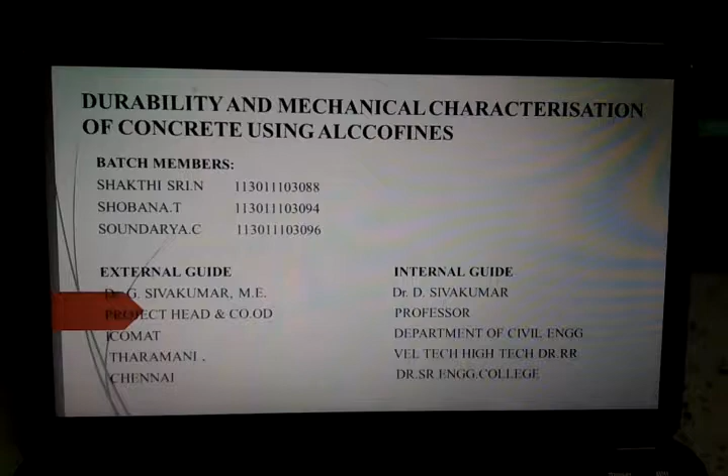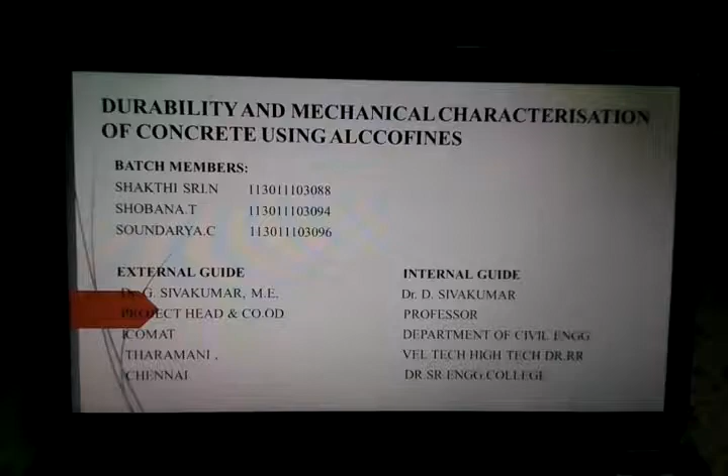Our project is Durability and Mechanical Characterization of Concrete using alccofines. Aim of our project is to evaluate the performance of concrete containing a supplementary cementitious material called alccofines, which is nothing but ultrafine GGBS.

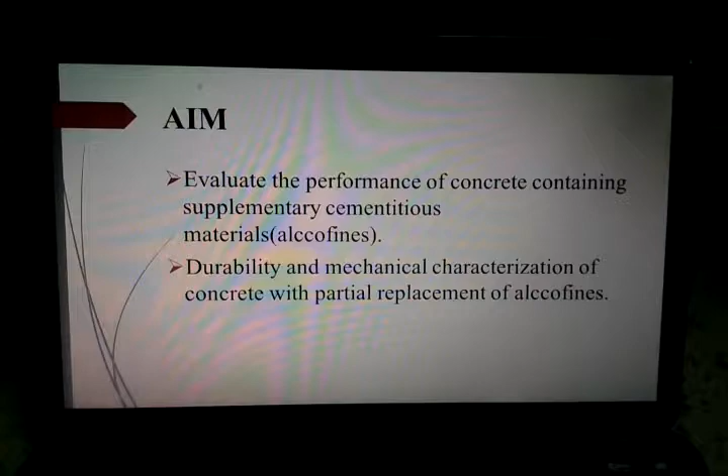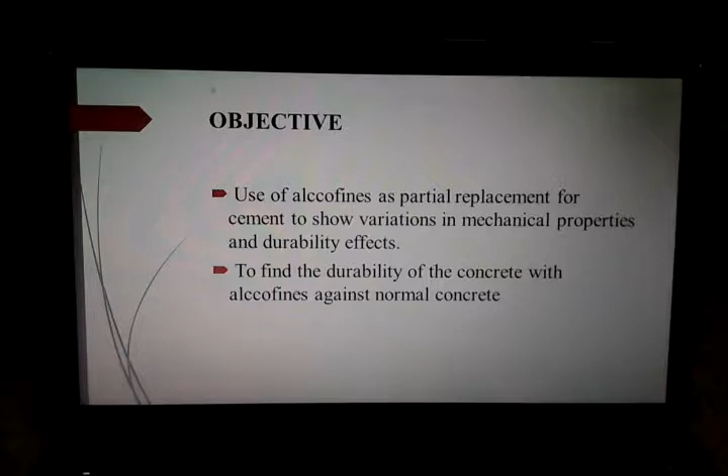The durability and mechanical characterization of concrete with partial replacement of alccofines is done. Objective: use of alccofines as a partial replacement for cement to show the variations in mechanical properties and durability effects is the main objective, and also to find the durability of concrete with alccofines against the normal concrete.

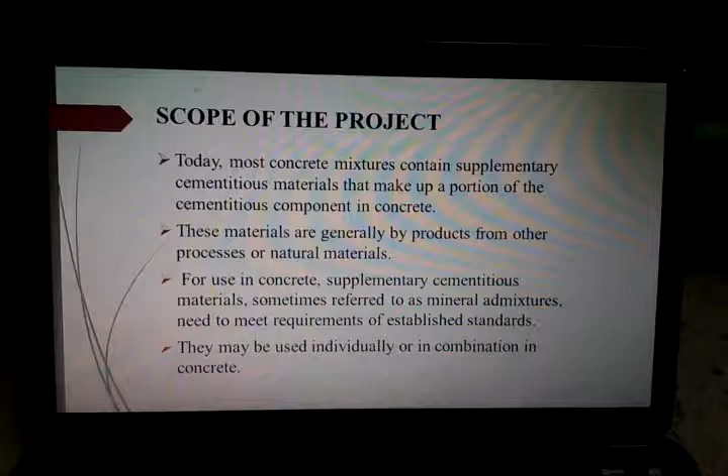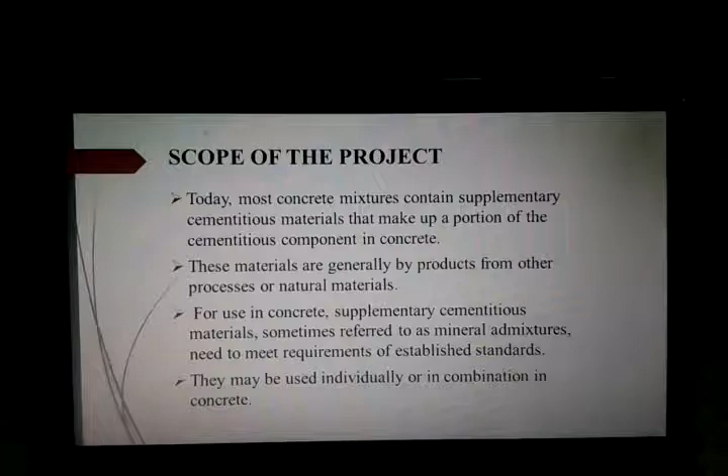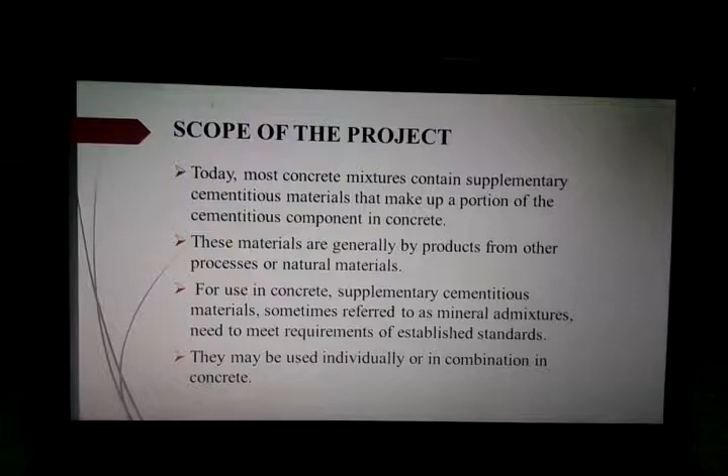The scope of the project is that today most concretes contain a supplementary cementitious material that makes up a portion of the cementitious component in the concrete. These materials are generally byproducts from other processes or natural materials. For use in concrete, supplementary cementitious materials, sometimes referred to as mineral admixtures, are added to meet the requirements of established standards. These may be used individually or in combination with other materials.

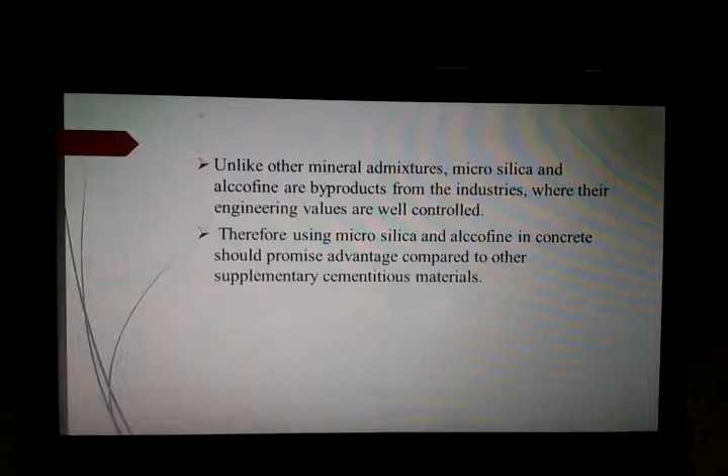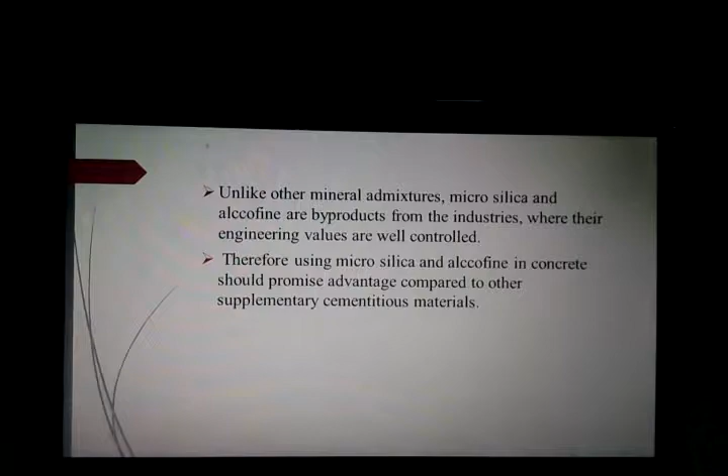Unlike other mineral admixtures, microsilica and alccofine are byproducts from industries where the engineering values are well controlled, and as they are byproducts, they are more useful than slag. Therefore, using microsilica and alccofine in concrete should promise advantages compared to other supplementary cementitious materials.

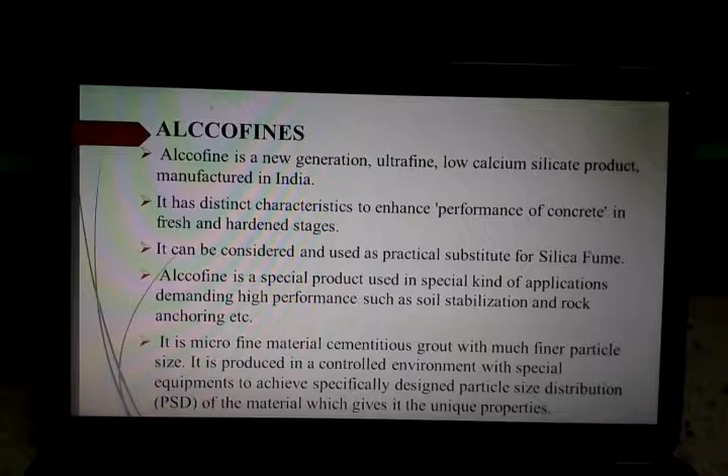Alccofine is a new generation ultra-fine low calcium silicate product manufactured especially in India. It has distinct characteristics to enhance performance of concrete in fresh as well as hardened stages. It can be considered and used as a practical substitute for silica fume.

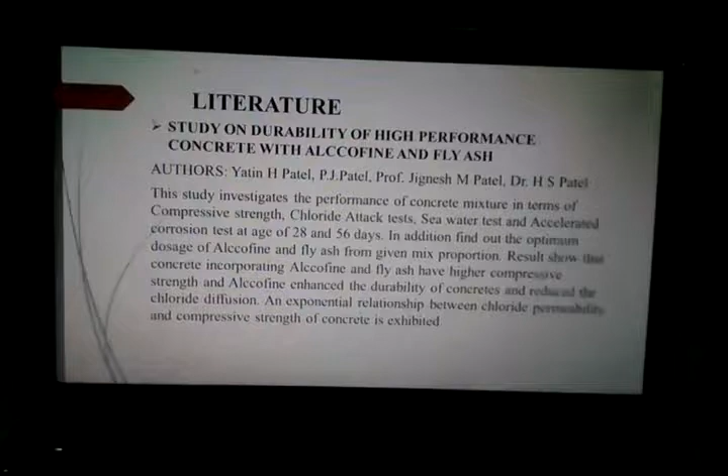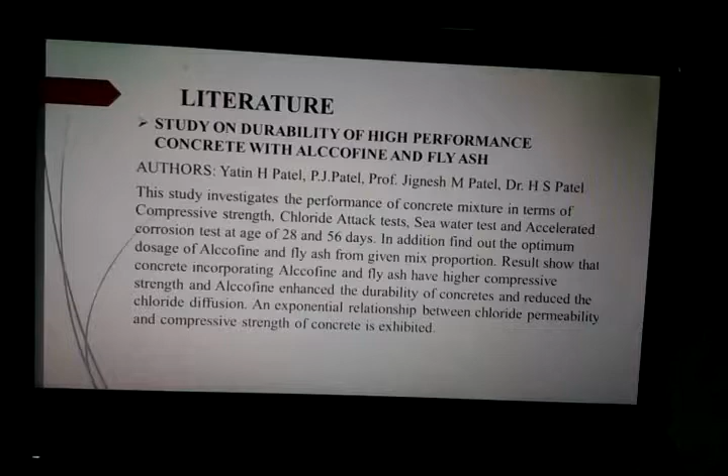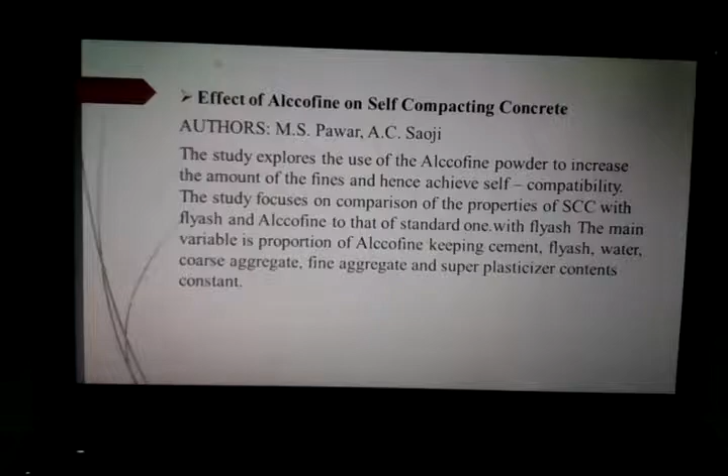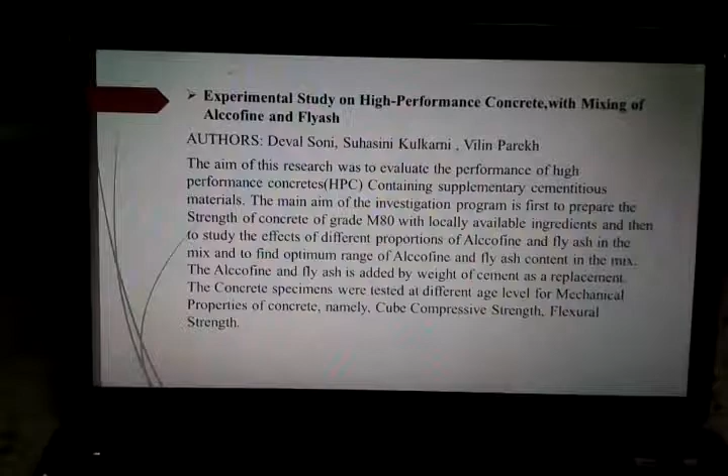Literature reviews: Following the literature we have collected, the first is a study on durability of high performance concrete with alccofine and fly ash, authored by Yatin H. Patel, P.J. Patel, Professor Jignesh M. Patel, Dr. H.S. Patel. The next paper is the effect of alccofine on self-compacting concrete, authored by M.S. Pawar and A.C. Saoji. The third paper is an experimental study on high performance concrete with mixing of alccofine and fly ash, authored by Deval Soni, Suhasini Kulkarni and Vilin Parekh.

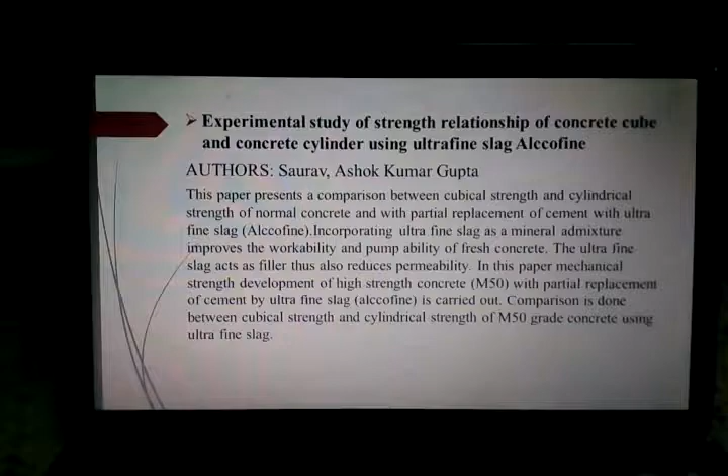The next paper is an experimental study of strength relationship of concrete cube and concrete cylinder using ultrafine slag of Alccofine, authored by Saurav Ashok Kumar Gupta.

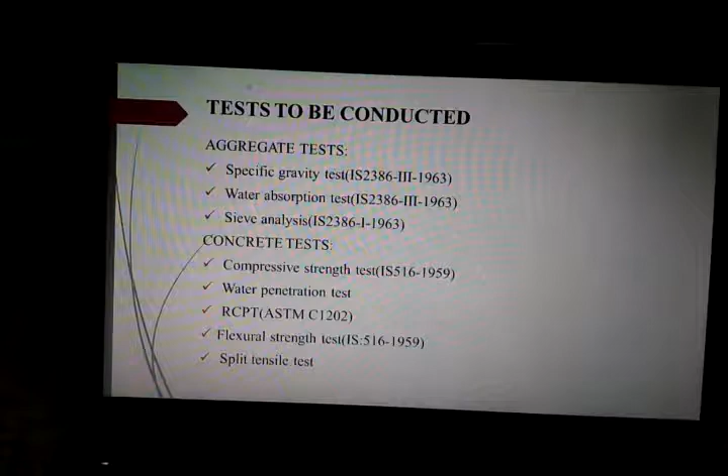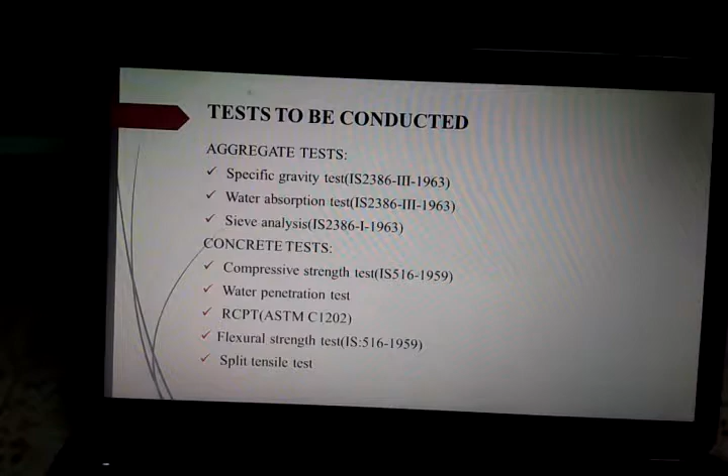The tests to be conducted are as shown here: aggregate test, specific gravity test according to IS 2386 Part 3 1963, water absorption test and sieve analysis of the same, concrete test, compressive strength test, water penetration test, RCPT - rapid chloride penetration test conforming to ASTM C1202, and flexure strength test.

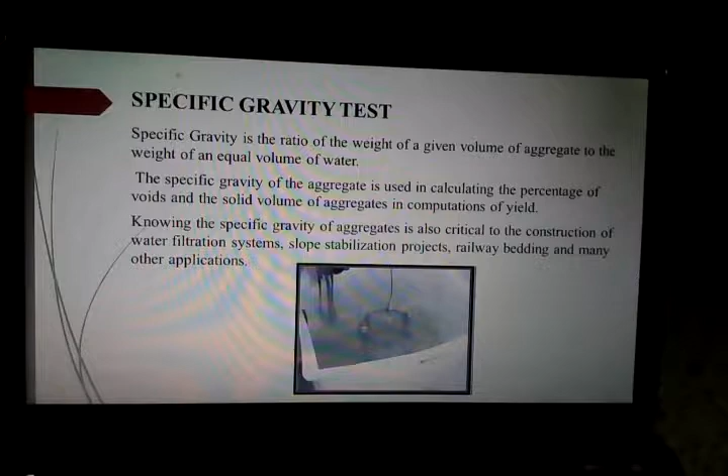Specific gravity test: specific gravity is the ratio of weight of a given volume of concrete or aggregate to the weight of equal volume of water. The specific gravity of aggregate is used in calculating the percentage of voids and the solid volume of aggregates in computation.

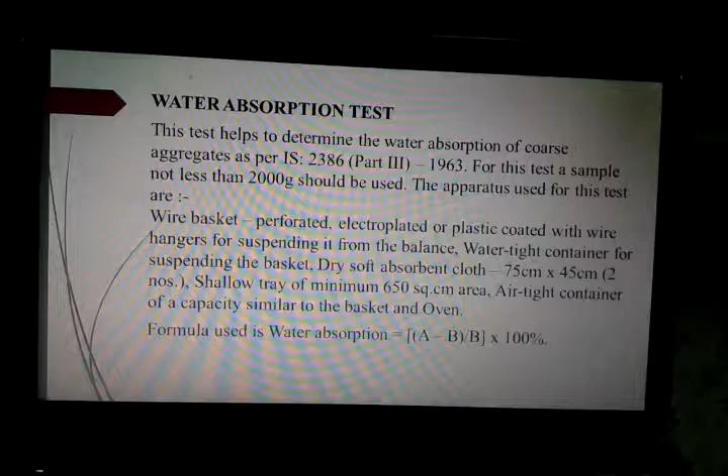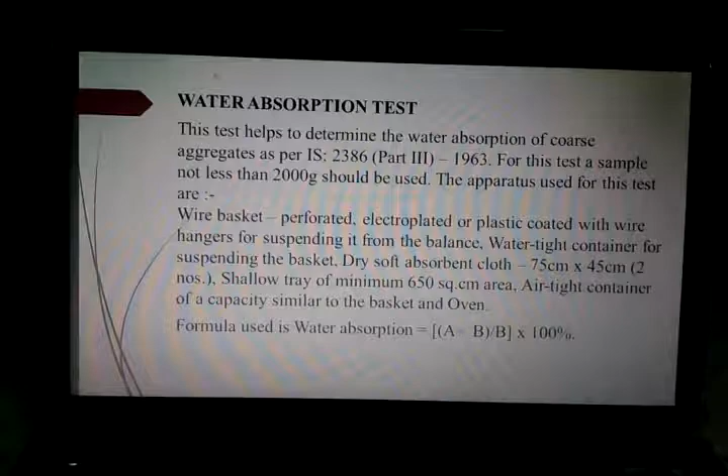Water absorption test: this test helps to determine the water absorption of coarse aggregates as per code IS 2386 Part 3 1963. The formula used is water absorption equals A minus B divided by B into 100%.

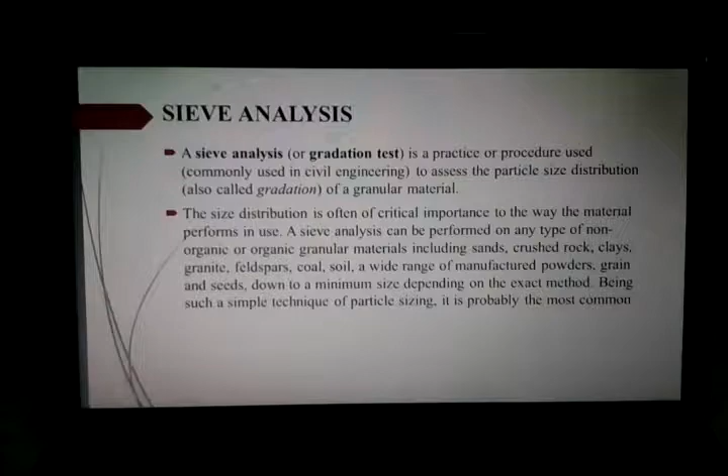Sieve analysis is nothing but the gradation test. It is a practice or procedure used commonly in civil engineering to assess the particle size distribution of granular material for both fine and coarse aggregate.

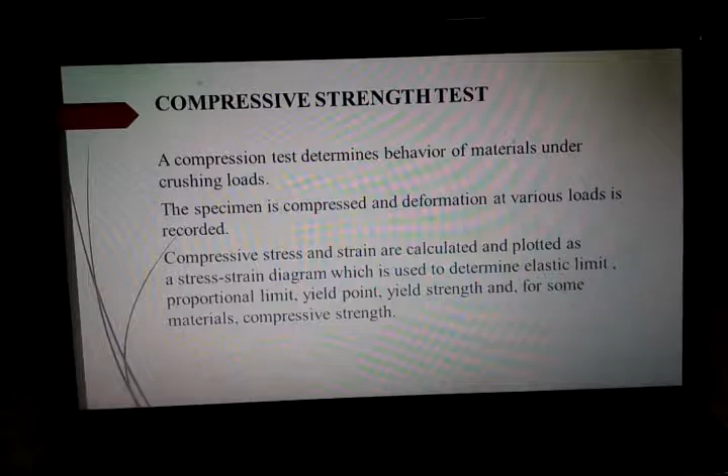Compressive strength test: a compression test determines the behavior of materials under crushing loads. The specimen is compressed and deformation at various loads is recorded. Usually a cube of size 150 by 150 is used.

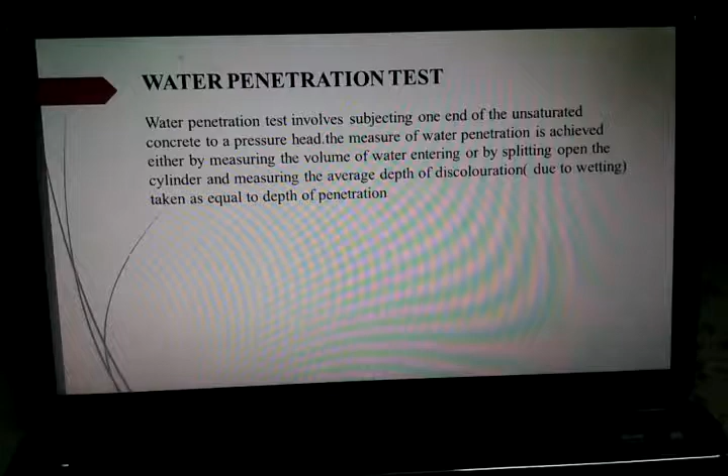Water penetration test involves subjecting one end of the unsaturated concrete to a pressure head. The measuring of the water penetration is achieved either by measuring the volume of water entering, or by split opening the cylinder and measuring the average depth of discoloration due to wetting, taken as equal to the depth of penetration.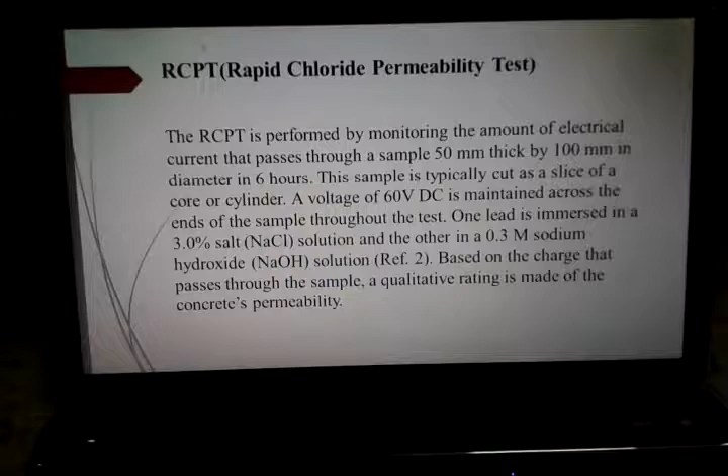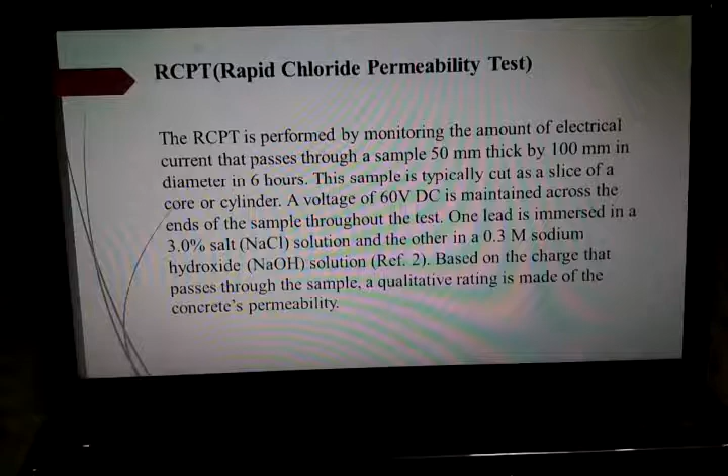The sample is typically cut as a slice of core or a cylinder. The voltage of 60 volt DC is maintained across the ends of the sample throughout the test. One lead is immersed in a salt, 3% NaCl solution, and the other in 0.3 molarity of sodium hydroxide, NaOH, solution.

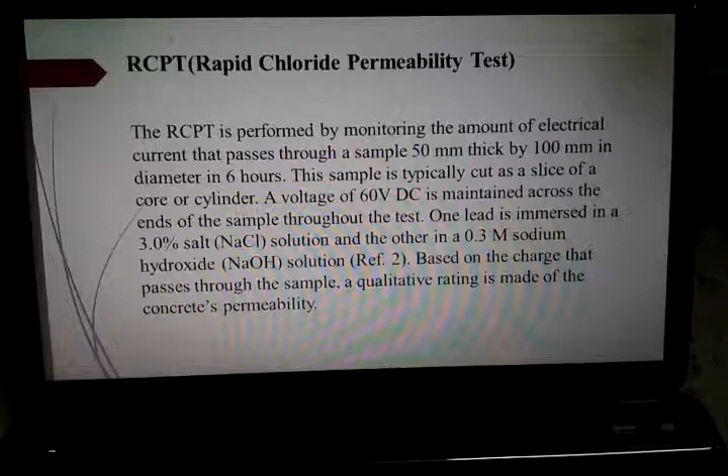Based on the charge that is passed through the sample, a qualitative rating is made on the concrete's permeability.

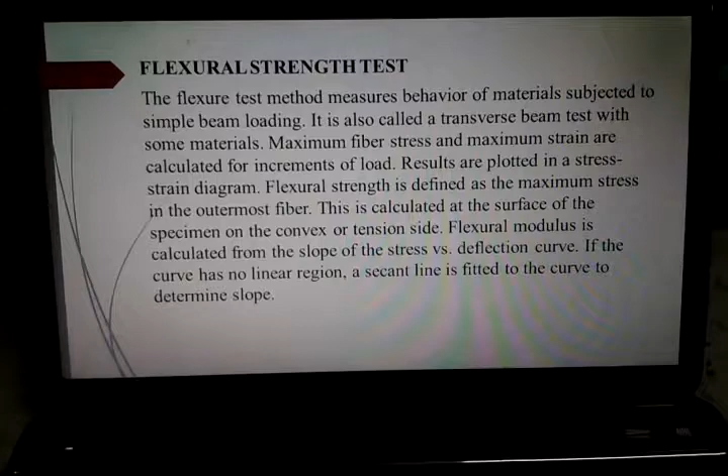Flexural strength test. The flexural test method measures the behavior of material subjected to a simple beam loading. It is usually taken as 2-point loading, also called a transverse beam test. With some materials, the maximum fiber stress and maximum strain are calculated for increments of load, and results are plotted in a stress-strain diagram.

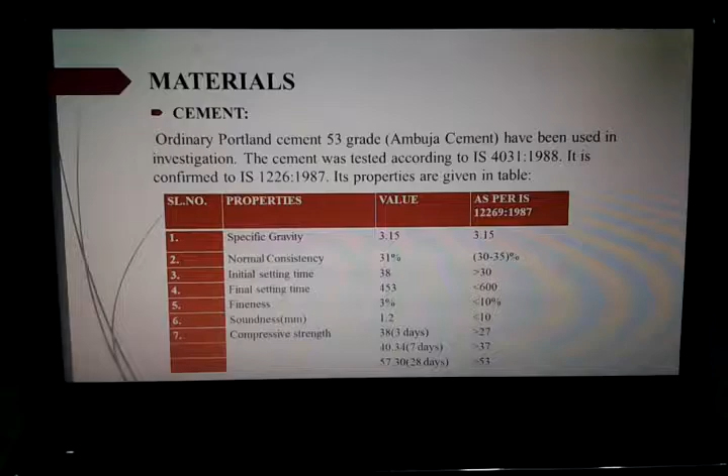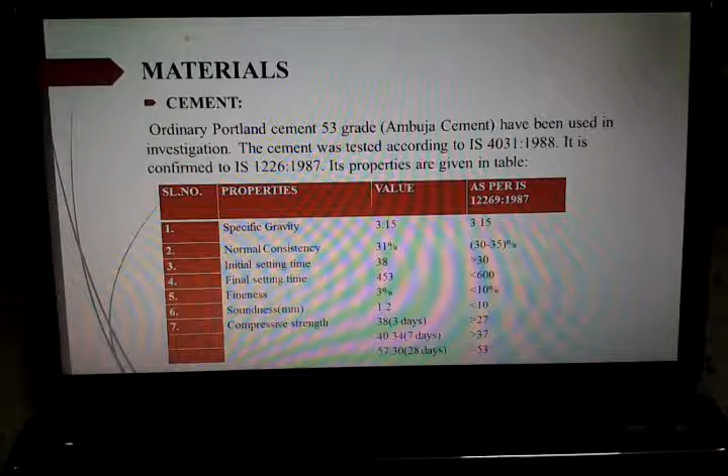Materials: cement. Ordinary Portland cement of grade 53 is used. The cement was tested according to IS 4031 1988, and it conforms to IS 1226 1987. Its properties are as tabulated.

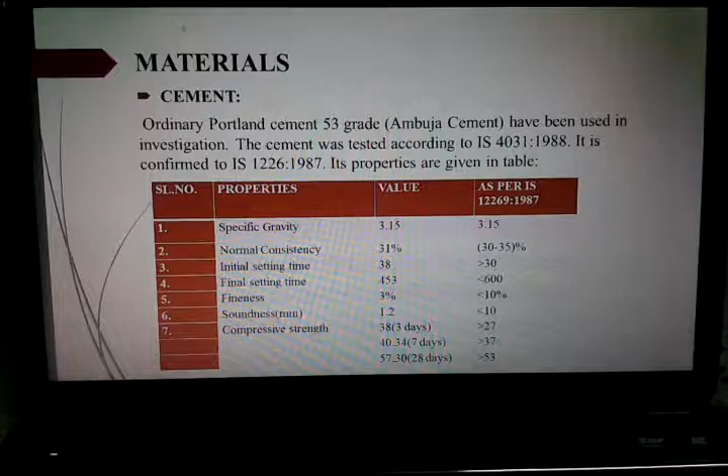Specific gravity is 3.15. Normal consistency is 31%. Initial setting time is found to be 38 minutes. Final setting time is 453 minutes. Fineness is 3%. Soundness is 1.2.

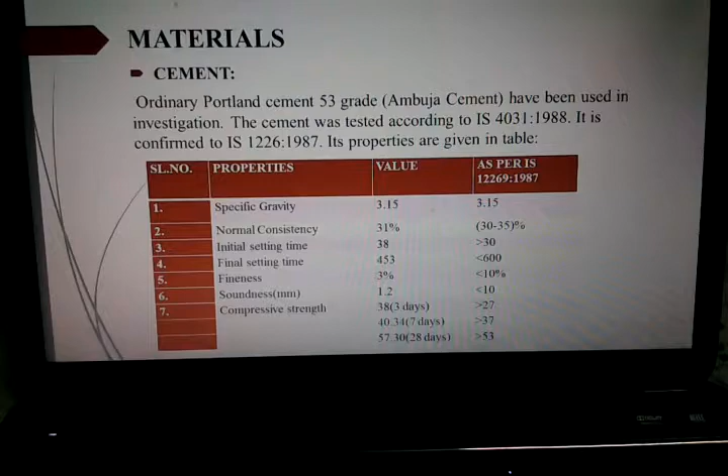The values are found to be as per IS 12269 1987. Fine aggregate and coarse aggregate: the properties of fine aggregate and coarse aggregate are summarized.

Coarse aggregate of 20 mm grade and 12.5 mm grade are used. Specific gravity of the same is tabulated. The fine aggregate is generally manufactured sand, but we've also taken the specific gravity and total absorption of river sand.

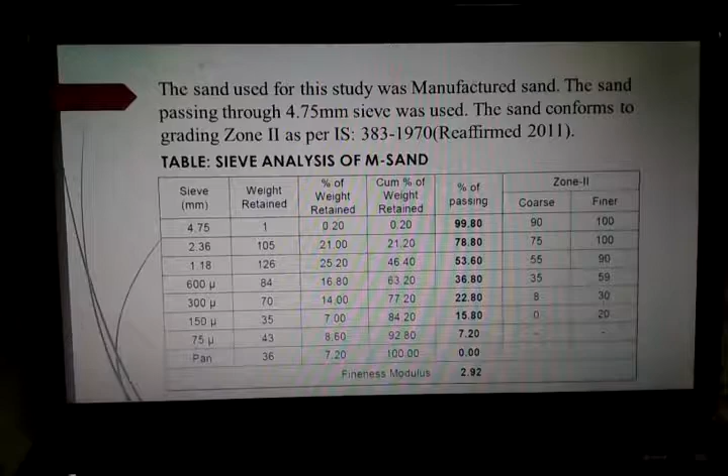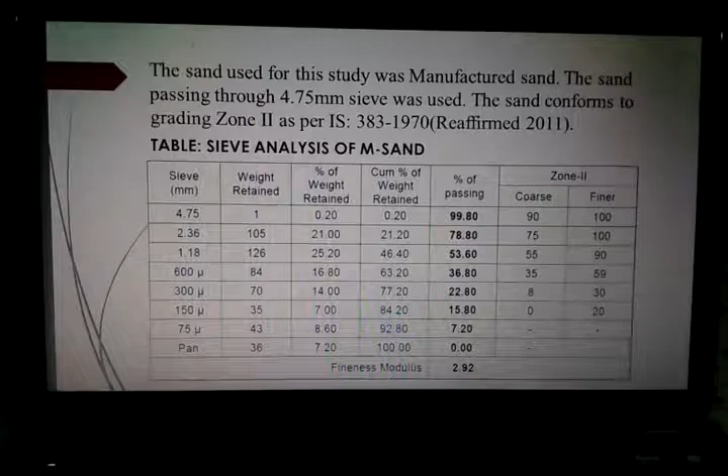The sand used for this study is manufactured sand, passed through a 4.75 mm sieve. It conforms to grading zone 2 as per IS 383/1970, reaffirmed in 2011. The sieve analysis of the M sand is as given, and the fineness modulus of the same is 2.92.

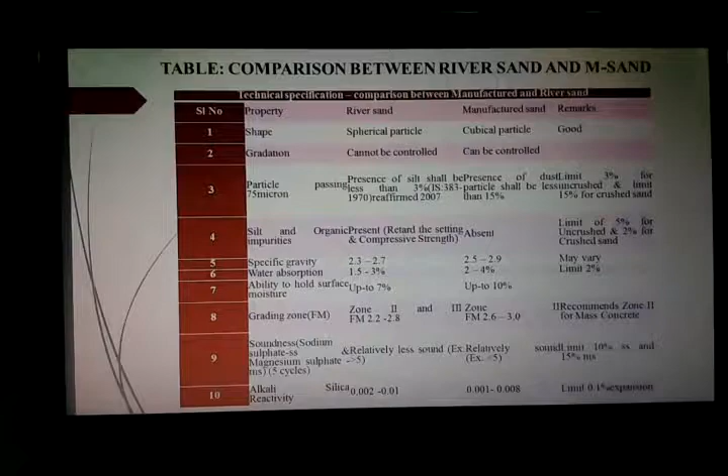A comparison between river sand and M sand is given. We have used M sand over river sand due to certain characteristics, and also because river sand availability is very minimal in the southern region of Tamil Nadu.

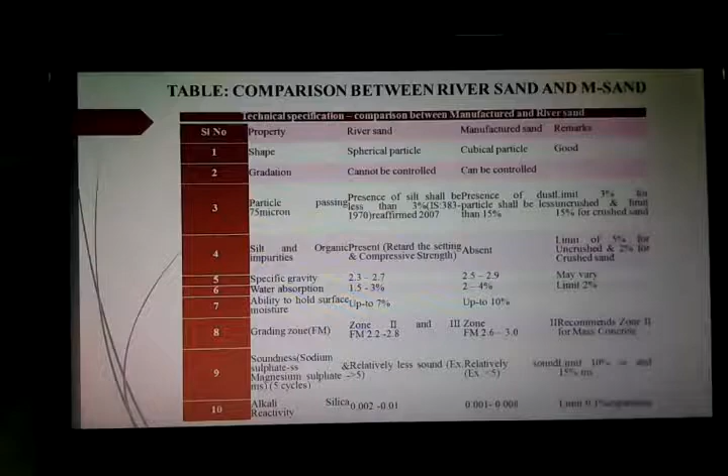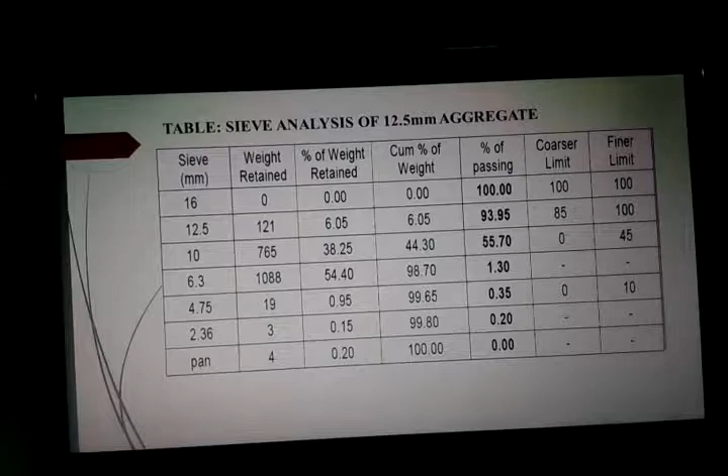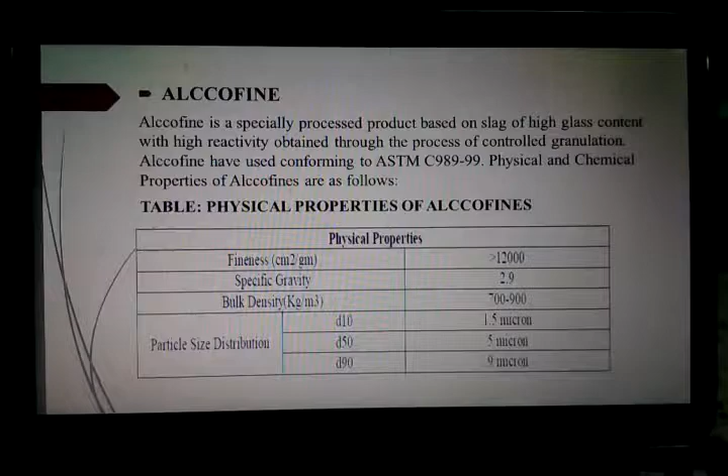Alccofine. Alccofine is a specially processed product based on slag of high glass content with high reactivity, obtained through the process of controlled granulation. The Alccofine used conform to ASTM C989-99.

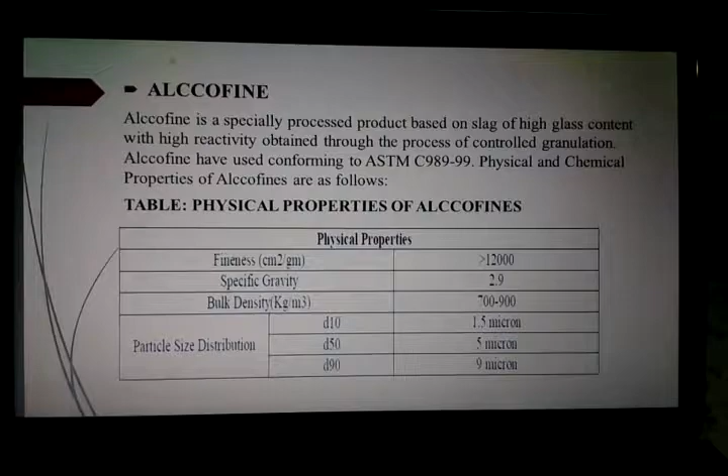Physical and chemical properties of Alccofines are shown. Fineness, specific gravity and bulk density are given here. Fineness is greater than 12,000 cm square per gram. Specific gravity is 2.9. Bulk density is 700 to 900 kg per meter cube.

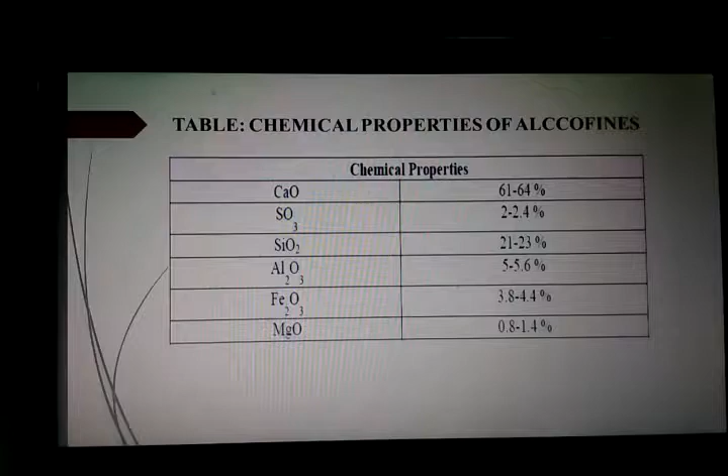Table: chemical properties of Alccofines. This is the chemical composition of the Alccofines: CaO, SO3, SiO2, Al2O3, Fe2O3 and MgO are as given.

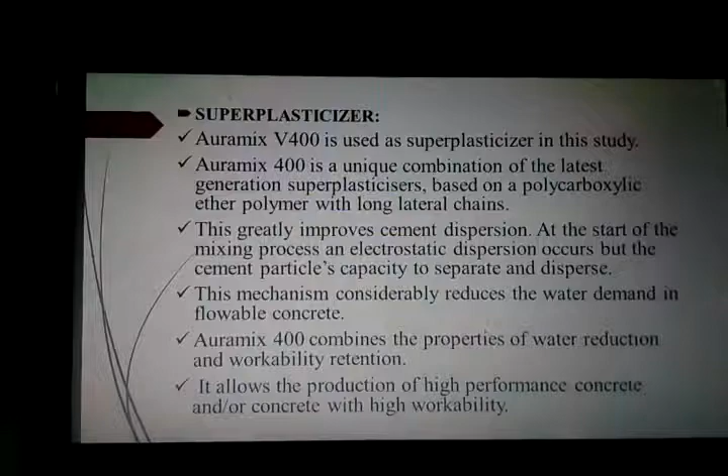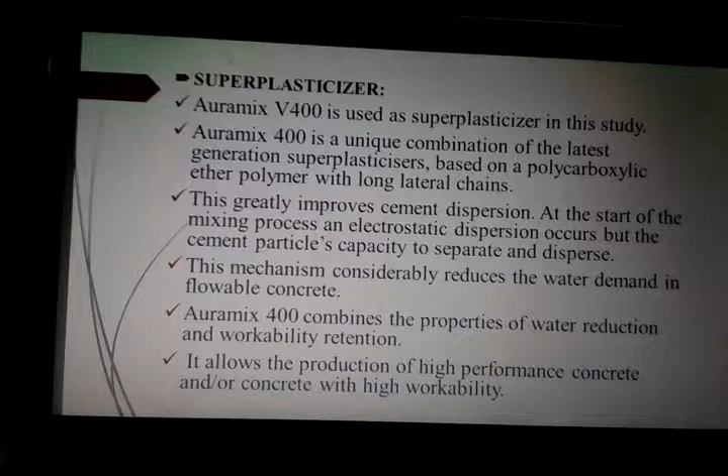Superplasticizer. We have used superplasticizer Auramix V400 for this study. It has a unique combination of the latest generation superplasticizers based on polycarboxylic ether polymer with long lateral chains. This greatly improves cement dispersion.

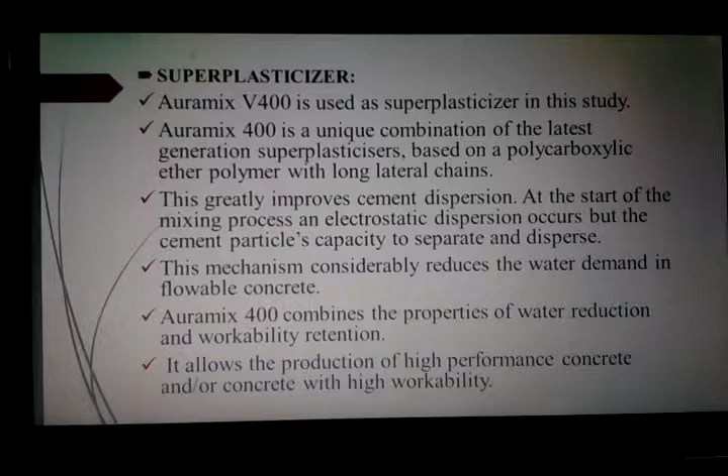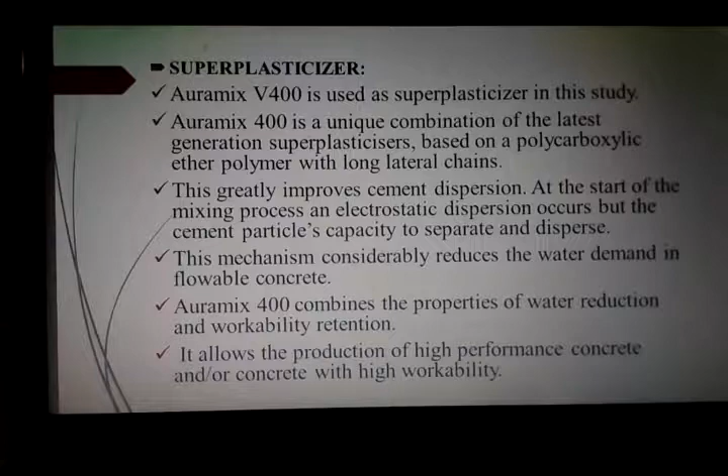At the start of the mix process, an electrostatic dispersion occurs, and the cement particles' capacity to separate and disperse increases. This mechanism considerably reduces water demand in flowable concrete. Auramix 400 combines the properties of water reduction and workability retention, allowing production of high-performance concrete with high workability at less water content.

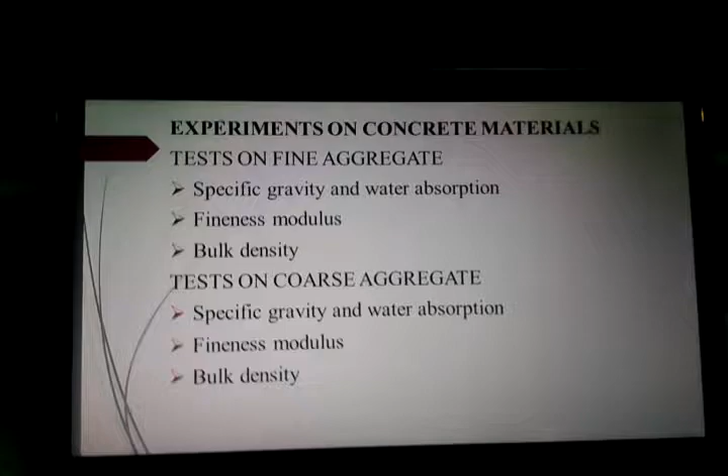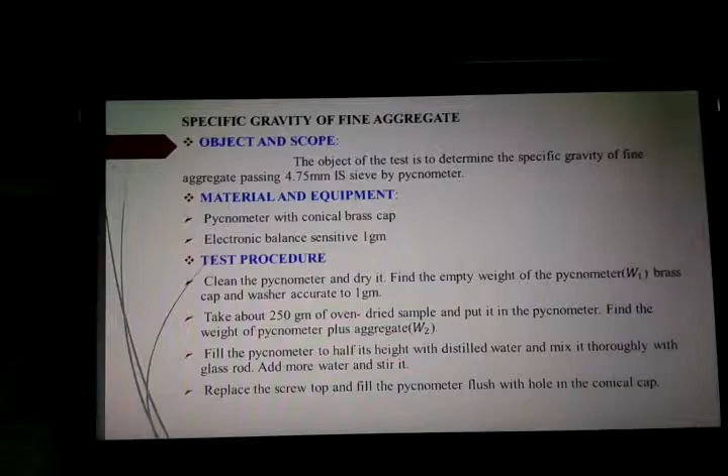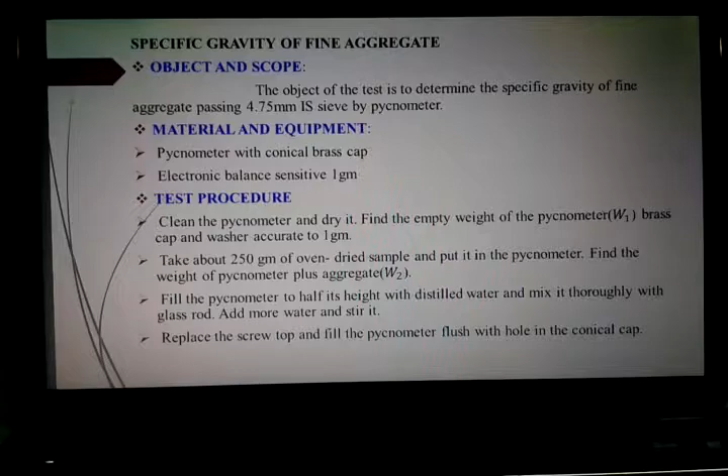Specific gravity on fine aggregate. The object and scope of this test is to test aggregate passing a 4.75 mm sieve by pycnometer. The material and equipment used are a pycnometer with conical brass cap and an electronic balance sensitive to 1 gram. The test procedure is according to IS code 2386 part 3.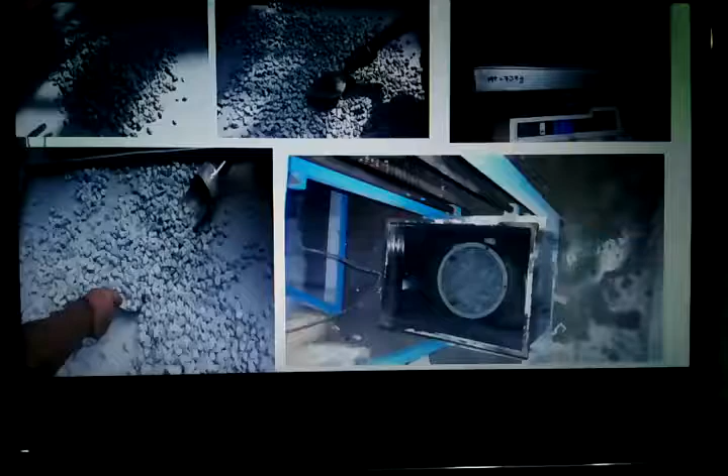Calculations were done and the water absorption value was found to be 1.87, with specific gravity 2.65. These are the testing procedures for coarse aggregate of 12.5 mm sieve.

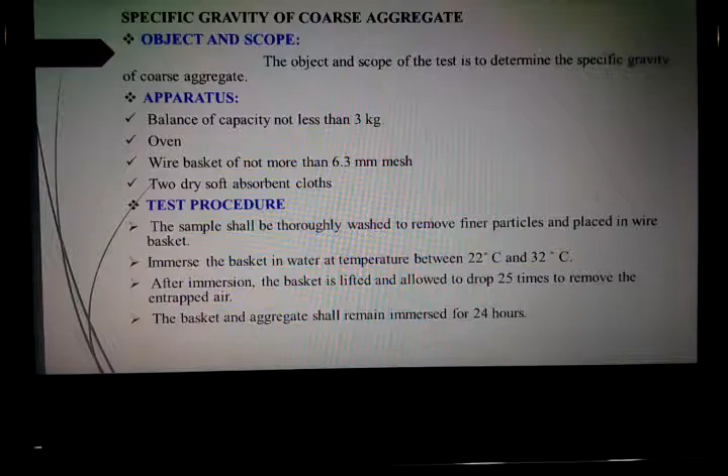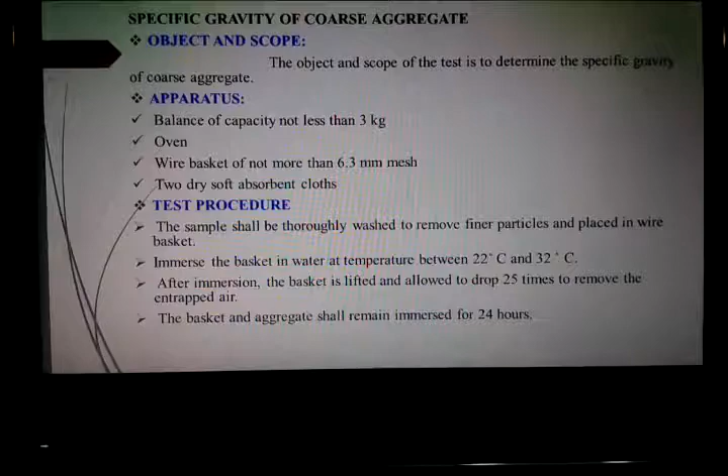Specific gravity of coarse aggregate. The objective is to test and determine the specific gravity of coarse aggregate at 12.5 mm and 20 mm. The apparatus used are a balance of capacity not less than 3 kg, an oven, a wire basket of not more than 6.3 mm mesh, and 2 dry soft absorbent cloths. The test procedure is confined to IS code 2386.

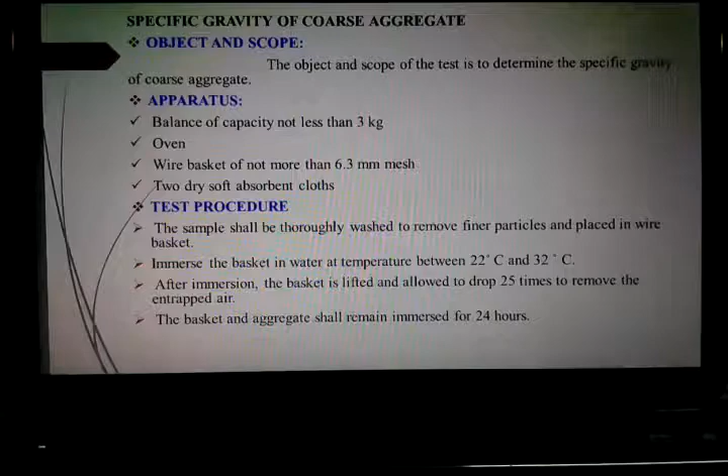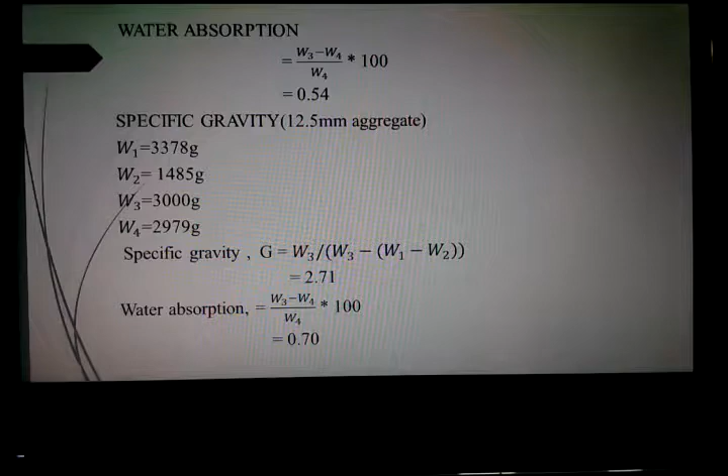Calculations were done and the specific gravity of 20 mm aggregate was found to be 2.68, with a water absorption value of 0.54. The specific gravity of 12.5 mm sieve was found to be 2.71.

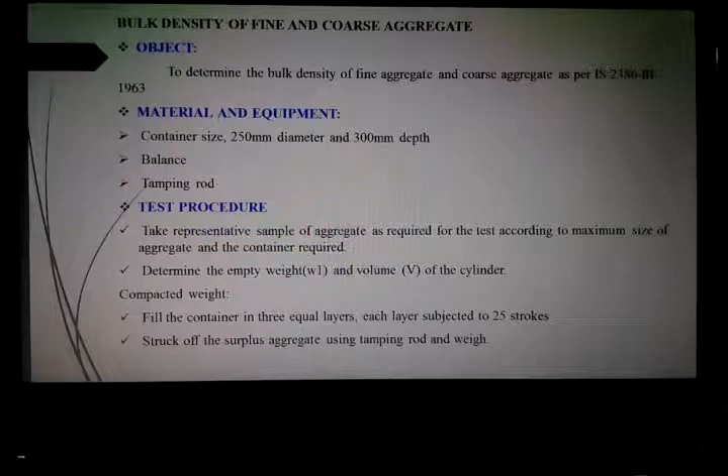Bulk density of fine and coarse aggregate are shown. To determine bulk density, we have used IS 2386, Part 3, 1963. The material and equipment used are as given.